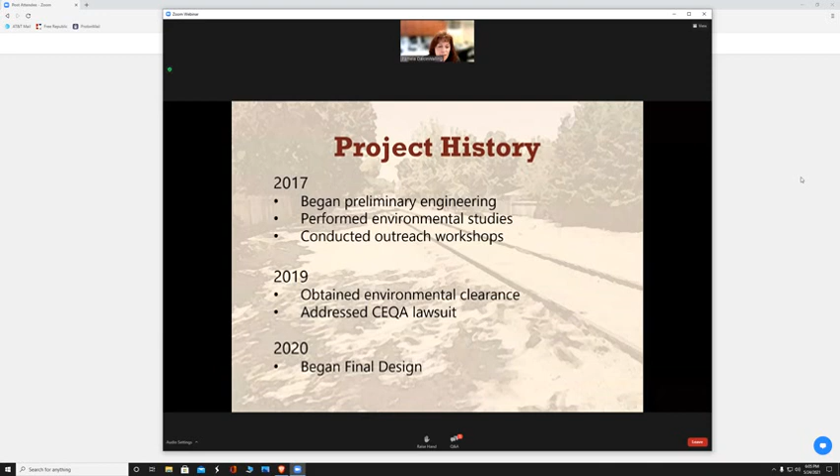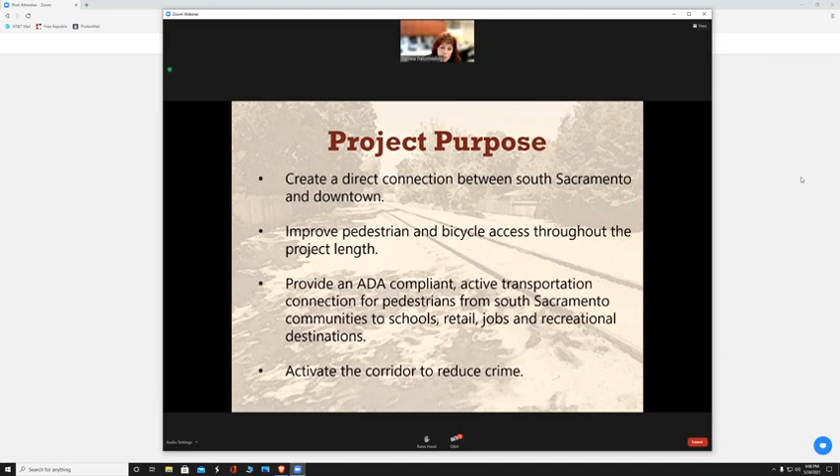The purpose of the project is to create a direct connection between the neighborhoods in South Sacramento and the downtown area. It will also improve pedestrian and bicycle access throughout the entire project length, and provide an ADA compliant active transportation connection between South Sacramento communities and all of the different land uses in the area, including schools, retail, jobs, and recreational destinations in the Southland Park area. In addition, since this corridor has been abandoned for some time, this project will activate the corridor by putting more people on the trail, which will serve to reduce crime.

Pamela, it's Lucy. I wanted to ask, someone asked if you could state the full name of the acronyms.

Sure. So ADA stands for Americans with Disabilities Act, and I'll try to be more attentive to that as we go through.

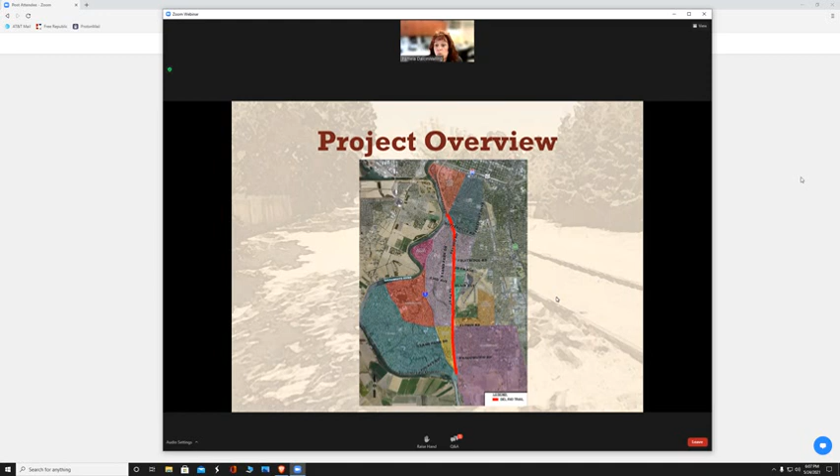So a quick project overview, just to give you a visual: it's about a 5-mile corridor that starts at the Sacramento River Parkway on the north end, and then travels in a north-south direction where it concludes near the Bill Conlin Sports Complex and the Freeport Regional Water Facility, better known as the Big Water Tower. That's just a quick visual on the length of the project.

We'll just step through from beginning to end, starting on the far north and then going towards the south, just to give you a sense of all the different characteristics of the project.

Continuing in a southerly direction, we'll be paralleling the tracks to the west. When we reach Sutterville Road, there'll be a new pedestrian actuated signal installed for safe crossing of Sutterville Road.

We'll continue south along the west side of the railroad tracks, crossing Southland Park Drive with a hybrid beacon signal - a rectangular rapid flashing beacon that will also be pedestrian actuated.

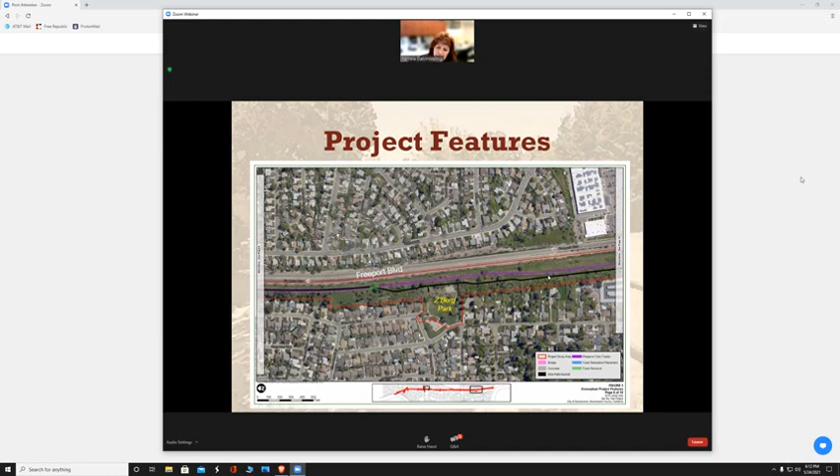Crossing over again in a southerly direction, the trail will parallel the east side of the tracks at this location and eventually cross down to provide a couple of connections with Z'Berg Park. At this point we are again west of the tracks, following in a southerly direction until we reach the intersection with Pocket Road and Freeport Boulevard.

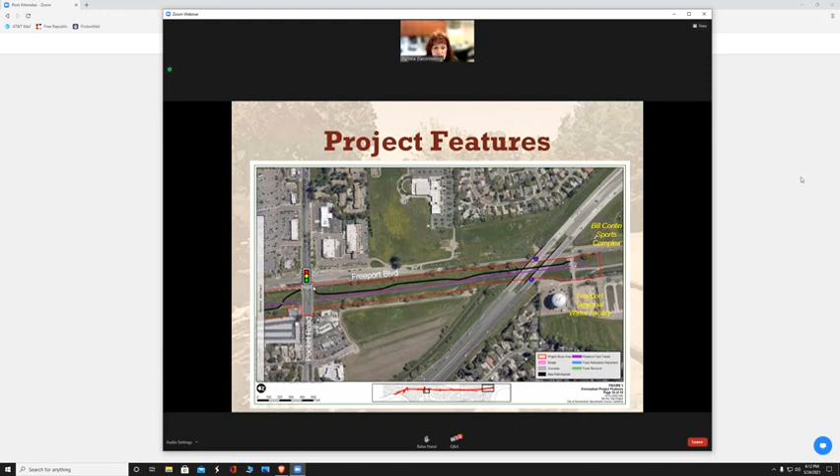At that location, we'll utilize the existing signal to cross and continue south along Freeport Boulevard just to the west, crossing underneath the bridge structures that were recently widened for the I-5 widening project. Then we'll connect up to the existing bike path at the Freeport Regional Water Facility, where you can either cross the street and access the Bill Conlin Sports Complex, or continue in a southerly direction connecting to the existing bike path. That's just a really quick summary of the various features of the project.

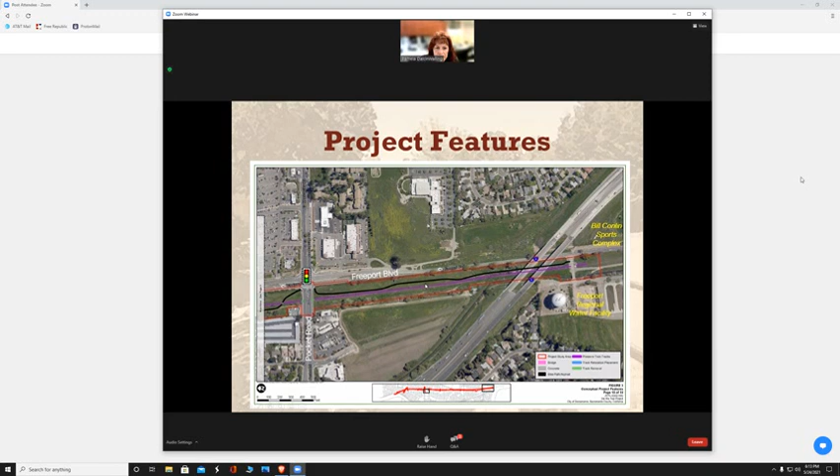I'm going to go through some of the activities we've been up to since we last got together. During final design, this is a time period that allows us to dive into the details. One of those details is making sure we're having minimal impact to the trees. There are a lot of trees along the corridor, so we've been working to make slight adjustments to avoid as many trees as possible, and where possible and appropriate, incorporate small retaining structures so that we can avoid those trees.

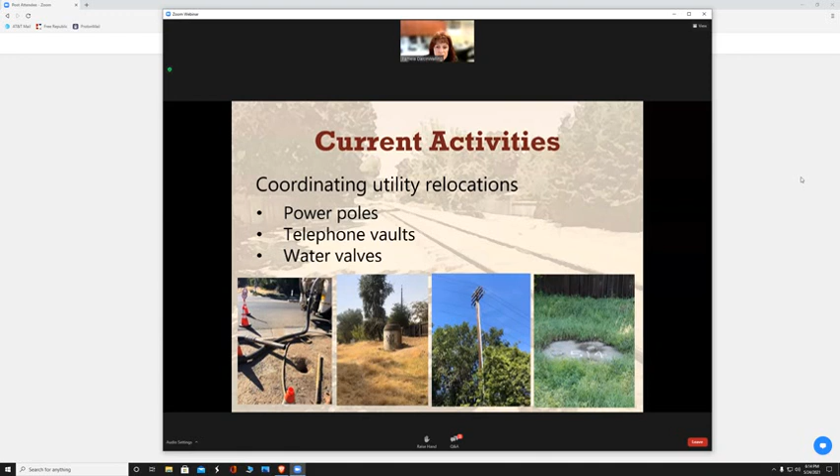Another item we've been focusing on a lot - this is a 5-mile corridor, and there are a lot of utilities that we're crossing, including water, sewer, electric, cable, and telephone. Where we are actually impacting those utilities, we are working with those utility companies to do minor relocations or adjusting their valves to grade.

In addition, we're also attaining our permits and approvals. Some of our permits are environmental related, so we're working with the California Department of Fish and Wildlife to obtain the streambed alteration agreement with that agency, and also working with the Regional Water Quality Control Board to get their 401 water quality certification for the project.

In addition to those permits, we're also getting approvals from the folks whose jurisdiction we're crossing, including the United States Army Corps of Engineers on the north side of the project where we touch down on the Sacramento River Parkway. That's actually a levee that has both jurisdiction with the Army Corps of Engineers and the Central Valley Flood Protection Board. For both of those agencies, we're working with them to get the encroachment permissions in order to connect into the Sacramento River Parkway.

And then finally, we do cross Caltrans's right-of-way with our crossing of the railroad bridge, and we're working closely with Caltrans to get the design approved for the modification to that bridge and for crossing their right-of-way.

In addition, we're also working on getting the complete right-of-way that we need for the corridor. The majority of the corridor is owned by the city of Sacramento, and that was through an agreement with Regional Transit - the city has purchased much of the corridor from Regional Transit. What remains is a small area on the north side of the project that goes through State Parks property, and we're working with State Parks to attain an easement through that area.

As part of this trail design, we're also designing a lot of connections, as we talked about in some of the exhibits I walked through earlier. We're going to be connecting on the south side of the project to the Bill Conlin Sports Complex. There's also a development going in just south of the Pocket and Freeport Road intersection, and we're going to be providing an access point for them as well. Again, as shown in the exhibits, we're connecting to Charlie Jensen Park, to Z'Berg Park, and also the city-owned lot on Palomar Circle.

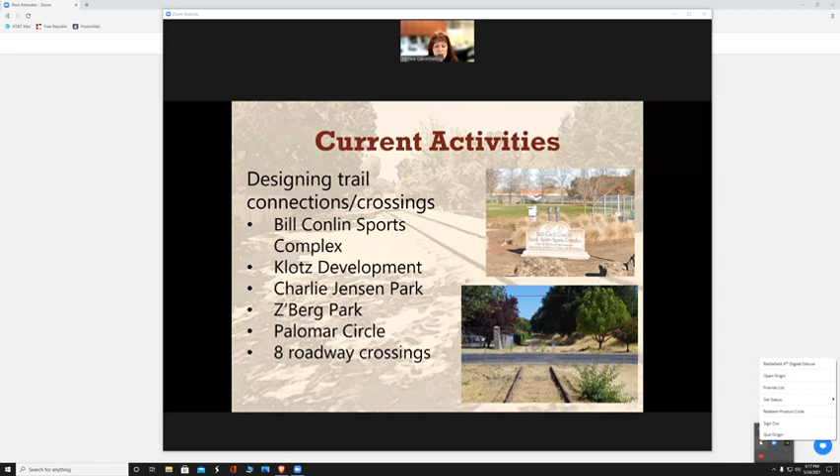As we went through in those exhibits, there are 8 roadway crossings that we're working with, and we talked a little bit about the treatments each of those crossings will have.

At some of those crossings, we're going to be incorporating decorative elements, including stamped and colored concrete, and also street name bands. An example is shown here where, approaching each of the roadway crossings, those decorative bands will have the street name that you're approaching, walking or biking towards those roads.

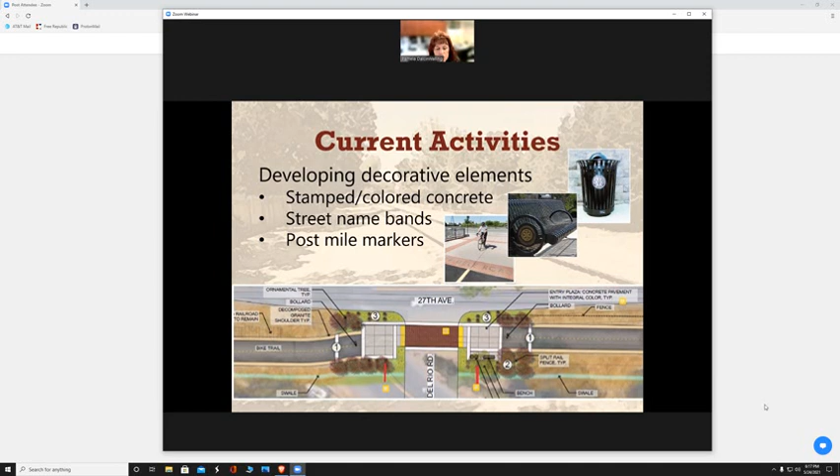And then also, as a way to keep track of where you're located along the trail, we'll also be installing some post-mile markers.

And then finally, we're also completing our structure designs. As we talked about, we're going to be modifying the I-5 bridge. There's currently a railroad bridge over I-5, and on the south side of that bridge we're going to be creating a cantilever structure so that the trail can cross utilizing the existing structure.

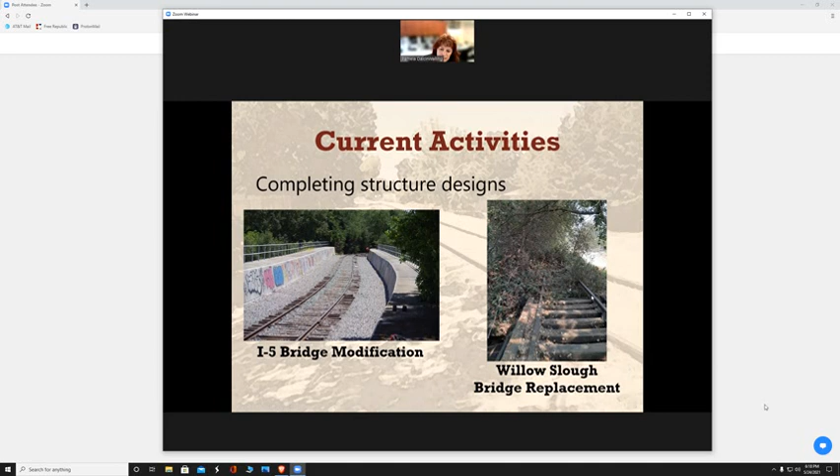And then finally, just south of Charlie Jensen Park, we will be replacing the existing Willow Slough Bridge with a new bridge in its place. And now I'm going to turn it over to Adam Randolph so he can talk about schedule and construction.

All right, excuse the awkward flip there, and the name on the screen. Ooh, our people are quick. Hi everybody, my name is Adam Randolph.

I'm the design project manager for the Del Rio Trail. I am a senior engineer with the city, so I will be with this project all the way through the end of construction.

As this graphic explains pretty clearly, right now we're finalizing our design, so that should be done by the end of this year, which means we will be ready to construct in spring of 2022.

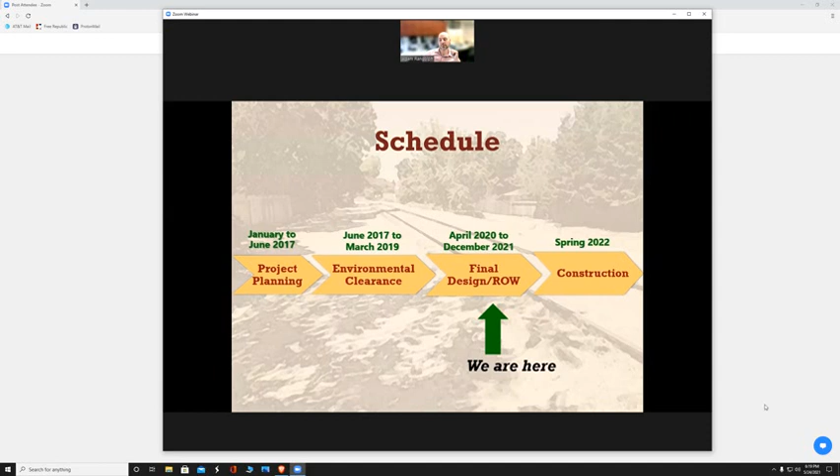The big question we ask is, what's the appropriate timing for construction? When we look at construction, there are a lot of challenges to coordinate. As Pamela just explained, we have the structure over I-5, which is going to be a sizable part of our construction project. It's probably going to take upwards of 4 months to construct, and we have to be careful what window we build that in.

We also have environmental limitations, working around endangered species, primarily nesting raptors, largely Swainson's hawk and other hawks. We have to plan for signal work, since signals are actually one of the items that take the longest time to order materials for, so those tend to put us out close to half a year. And of course, we have to plan for the 5 miles of trail paving, which isn't an insignificant amount.

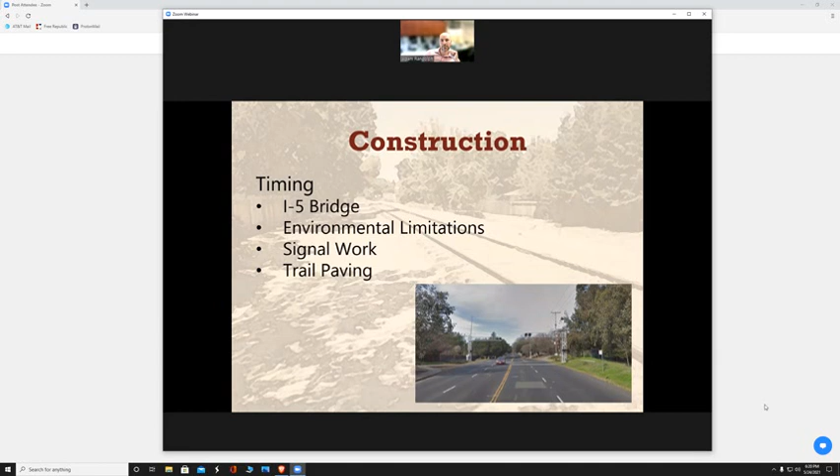So while we're planning this, we plan to be in construction in 2022. One of the big things we're trying to make sure of is that our bridge construction doesn't affect the recreational rail line out of Old Sacramento, particularly during Polar Express time in winter. So we're shooting for summer, or mid to late summer, to get everything done, and we should have everything wrapped up, we're hoping, by September or October of 2022.

So in the meantime, we're going to be continuing with all those next steps that Pamela just walked through. Once we have our design plans finalized, once we have all of our permits in hand, we'll be able to advertise the project. At that point, we will get our contractor on board and really lock down what our construction schedule is going to look like. And once we know what that looks like, we will of course be reaching out again and giving everybody an update on what to expect in their neighborhood at more specific times.

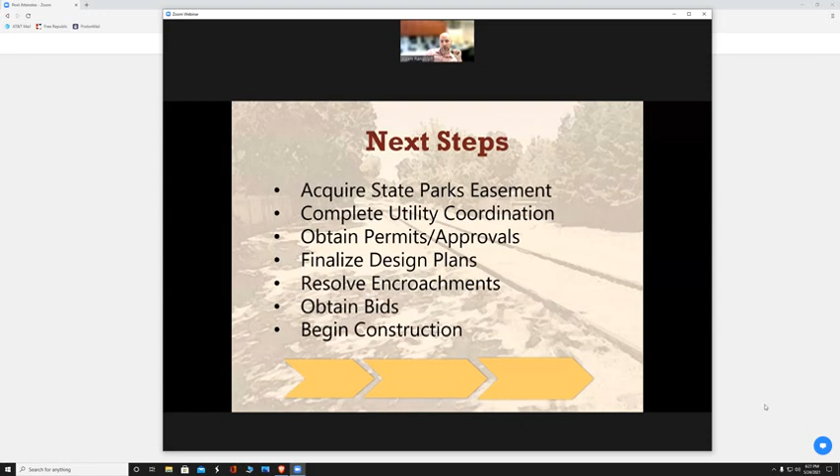So what we're going to do tonight is we're going to answer all project-specific questions. If there's something that's not a project-specific question, we won't be answering that tonight. We're going to generally be touching on encroachments so that you all have an understanding of the process, but those are best handled on a case-by-case basis with the city. We know many of you are already talking to the city. So I'm going to go through a couple of the questions that we received prior to the meeting and walk through those with you, so that you understand some of the questions that we had.

Is the city planning to install security fencing along the trail? The trail is going to be built similar to other parkways within the city. Property owners will be able to maintain their property fences along the trail. No additional fences or barriers are planned.

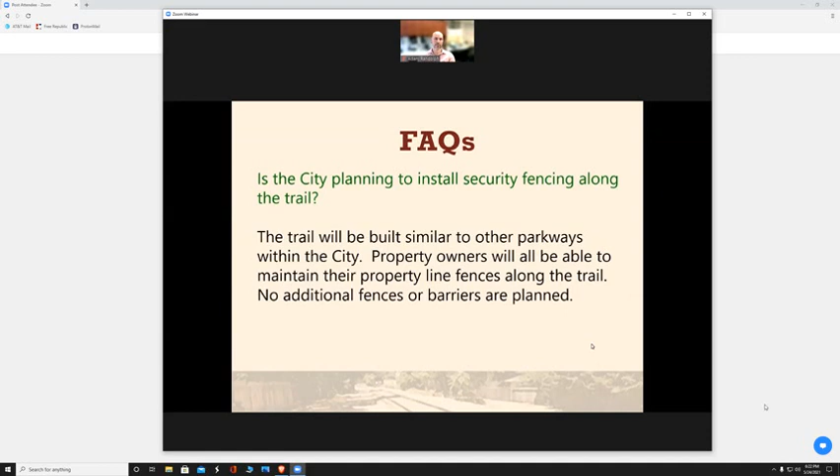How is the city handling encroachments? The city is engaging one-on-one with property owners who are currently encroaching into public property, and those details are being worked out on a case-by-case basis, as I mentioned.

What are the security plans, and is there a plan to discourage camping? Once the trail is constructed, the corridor will be patrolled by the city's park rangers, and they, together with PD, the police department, will respond to calls and ensure that there's no loitering after sunset, no camping, and no accumulation of garbage or personal possessions along the trail. Subsequent strategies will evolve as needed to address specific issues.

Before I read off the next question, I wanted to let someone who had asked a question in the chat box know that if the acronym you're curious about was SACOG, that's the Sacramento Area Council of Governments, and they're the ones that provide funding for projects like this.

Is there any type of lighting plan for the trail? Lighting will be provided at locations where the trail crosses a street and on the bridge over I-5. For the trail itself, the city's policy is not to provide lighting along bicycle and pedestrian trails.

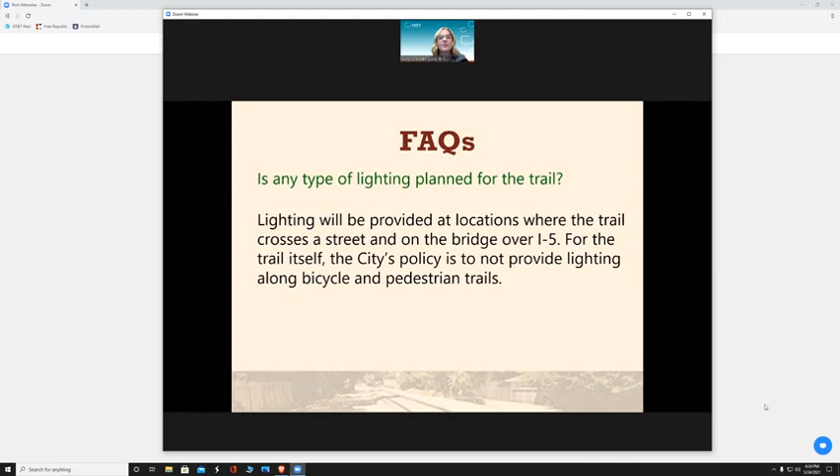What type of landscaping is being planned, and who is maintaining the landscaping, and how often will that be? Site furnishings and landscaping are currently being considered at trail entry points. However, maintenance is still being worked out and may result in modifications to the current concepts.

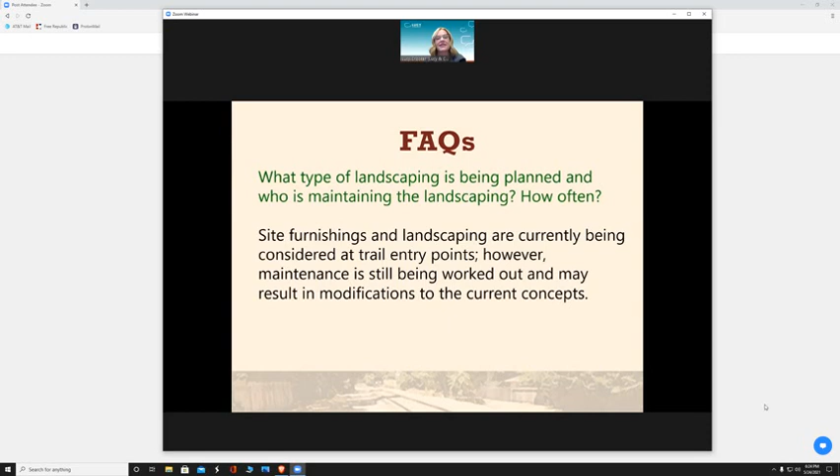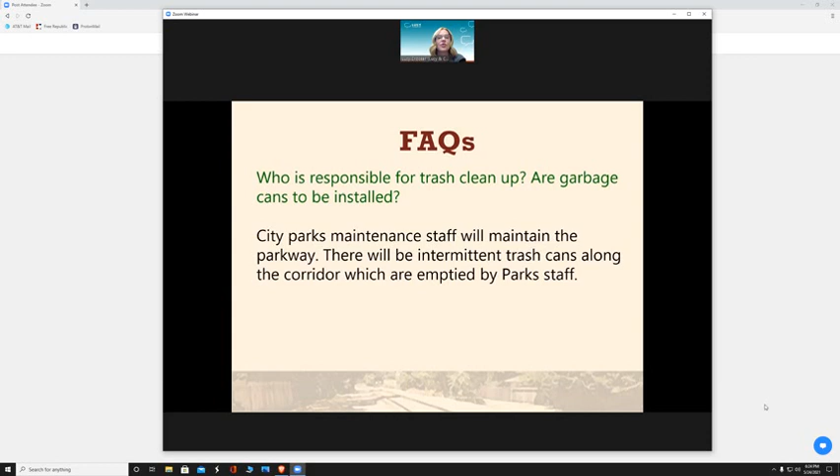Who is responsible for trash cleanup, and are garbage cans going to be installed? City parks maintenance staff will maintain the parkway, and there will be intermittent trash cans along the corridor, which will be emptied by the park staff.

Are dogs required to be on leashes while using the trail? Yes, the city has a city-wide leash law as part of their public policy that would apply along the Del Rio Trail also.

Will the trail have posted hours similar to a city park? Because trails are funded with active transportation funds and are intended as commuter corridors, it is not permissible to have posted hours for trails.

What other items are planned to be installed? Some park benches, trash cans, and stamped concrete will be installed. Enhancements outside these categories will need to be explored as a separate project with the city's Youth, Parks, and Community Enrichment Department, which is basically what used to be parks, and will likely need funding from private donations and/or sponsorships.

What provisions will be taken to minimize noise, dust, and air pollution? Mitigation measures are being incorporated into the project specs. The city and the city's contractor are legally required to implement these measures to control dust and air pollution during construction, and in addition, they must abide by the city's noise ordinance.

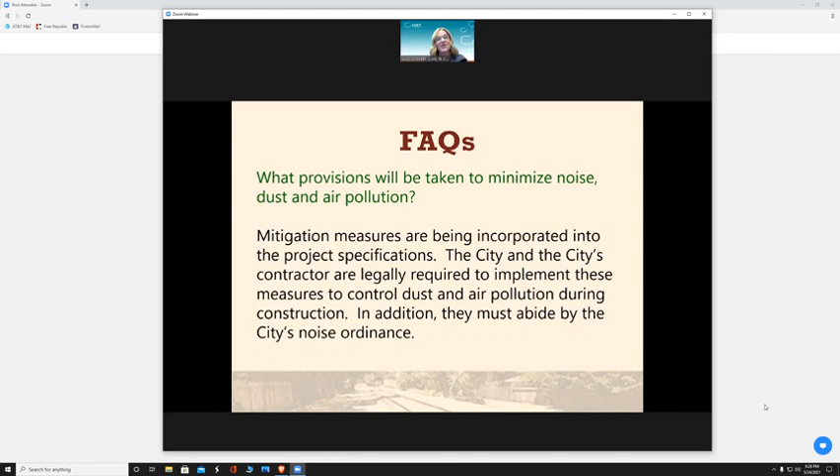Are construction drawings available to view? The city policy is not to issue draft plans to the public. However, plans have not changed significantly from the concepts presented with the approved environmental document.

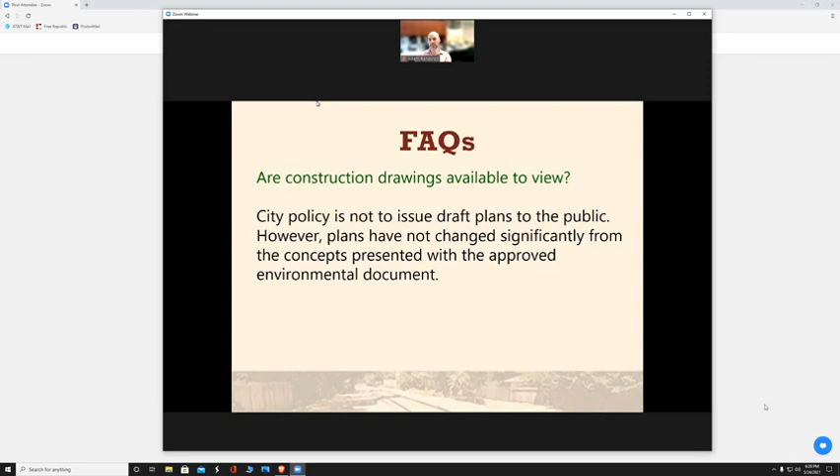Thank you, Adam. And that's something I do want to let everyone know. If you have not been on the website, it is robust with information. There are tons and tons of FAQs, all the documents like Adam talked about, meeting minutes or meeting recaps from past meetings. Pretty much everything about the project is on the website, so that should help you if you have any questions later on.

So what are the impacts to potential historic resources along the trail? The tracks and the embankment have been identified as historic resources in the project corridor. Impacts as described in the final environmental document include removal of rail as needed for safety and lowering of the embankment at the Del Rio, Normandy, 27th Avenue crossing to provide an ADA compliant east-west path of travel for bicyclists, pedestrians, and school children.

What provisions are to be made to minimize the removal of mature trees? I know Pamela addressed that a little bit, but just a little more for you. While it's not possible to avoid all tree removal, the design team is doing everything they possibly can to narrow the footprint of the trail. This includes using the steepest slopes allowable and adding minor walls where appropriate to protect mature trees.

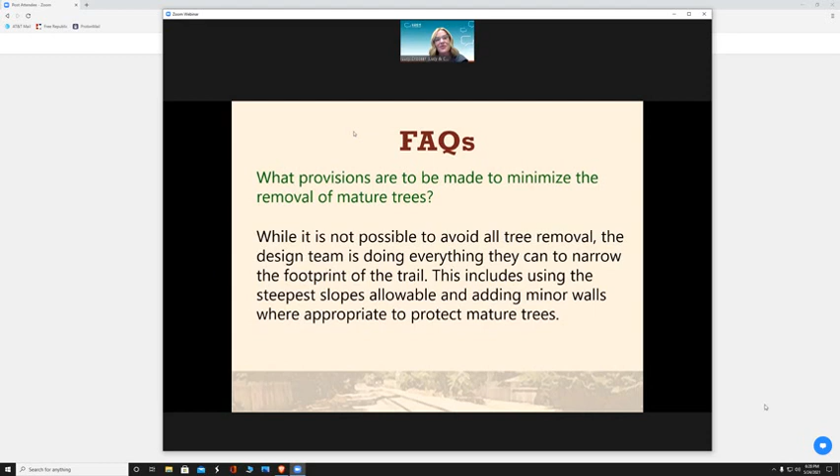Is there any outreach plan for the unhoused currently living along the trail? If there are any plans for outreach, when do the plans go into effect? In order to safely construct the project, unhoused individuals may not be in the corridor. Prior to construction, the city will work with unhoused individuals along the corridor to ensure they are safely relocated prior to construction.

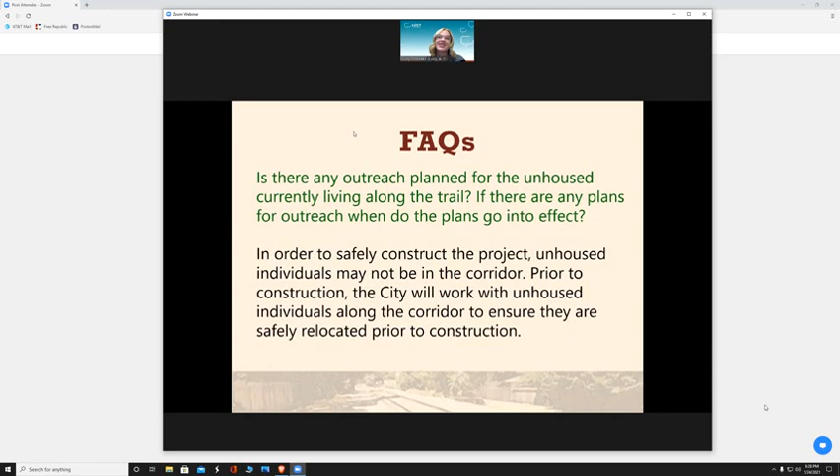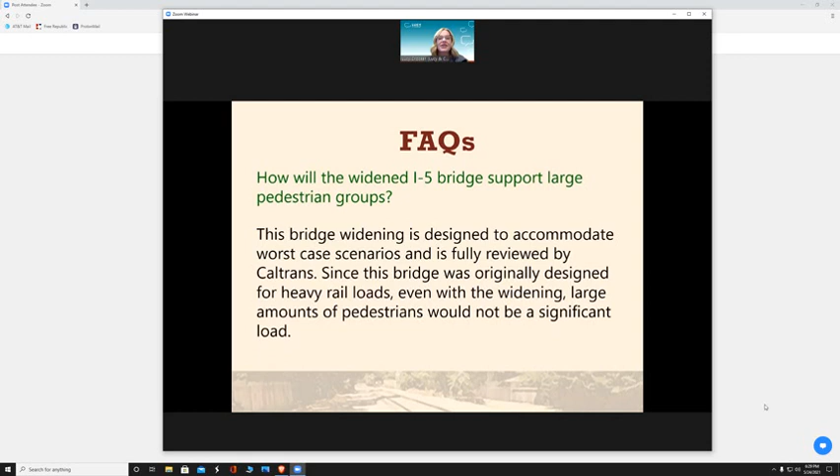How will the widened I-5 bridge support large pedestrian groups? This bridge widening is designed to accommodate worst-case scenarios and is fully reviewed by Caltrans. Since this bridge was originally designed for heavy rail loads, even with the widening, large amounts of pedestrians would not be a significant load.

Is the current plan to remove or disturb any of the existing rails on the direct north side of Fruit Ridge Road as a part of the project? As shown in our environmental document, a short stretch of tracks at Fruit Ridge Road must be removed to allow for an accessible crossing for trail users.

Can the southern end of the bike trail be extended all the way to the town of Freeport or to Cosumnes River Boulevard? The southern limit of the project is at the Freeport Regional Water Facility, which allows connections with the Sac River Parkway and the Bill Conlin Sports Complex. Future projects in the city's bicycle master plan include extension of the trail beyond Cosumnes River Boulevard, as well as tie-ins to other city trail networks.

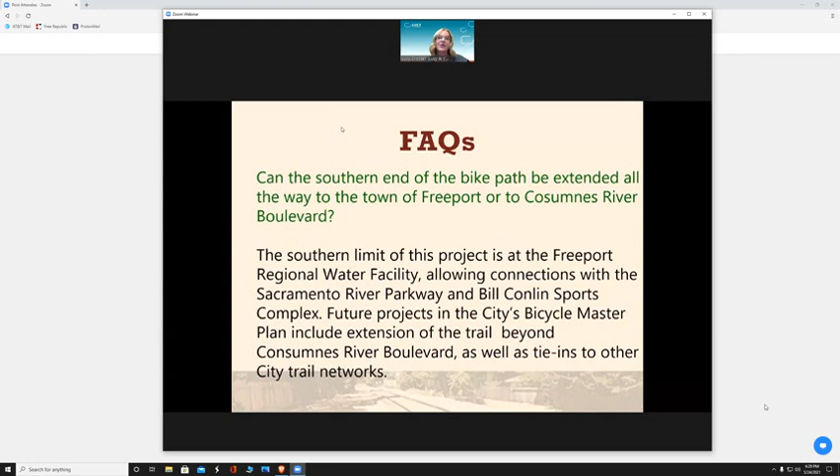So if the tracks are being preserved, what purpose will they serve going forward? Will there be plans for some sort of rail project, or is it just a heritage track? To my knowledge, there are not currently plans for any sort of rail project. California State Parks, working with the Railroad Museum, are always looking for a potential project to take a recreational train down to essentially Land Park, down to Sutterville Road on the backside of the zoo. There would not be any project further than that, since that's where the continuity in the tracks would be broken.

What entity will patrol to prevent this project from becoming a homeless highway, as many neighbors anticipate? I think we covered that in the presentation already, but this trail will be patrolled by the city park rangers, and Sacramento PD would also be assisting them with that.

Why is there no actuated flashing beacon at 43rd? Anytime we put in a protected pedestrian crossing, we follow a set of guidelines that the city has developed to ensure safer pedestrian crossings. At 43rd Street, we are going to put in what we generally call bulb outs or curb extensions, essentially shortening the length of the crosswalk. However, the amount of traffic on the street didn't warrant putting anything beyond that.